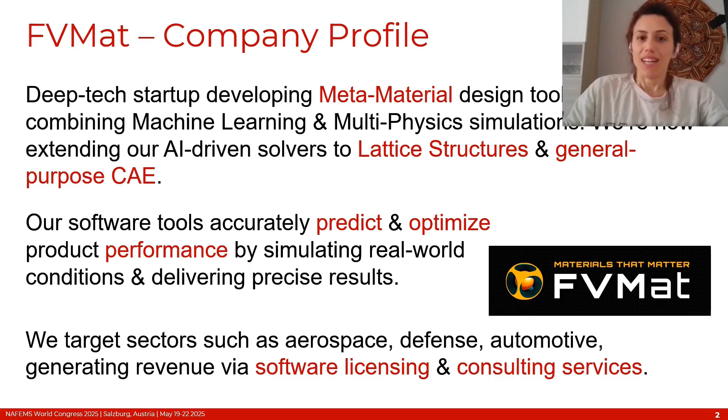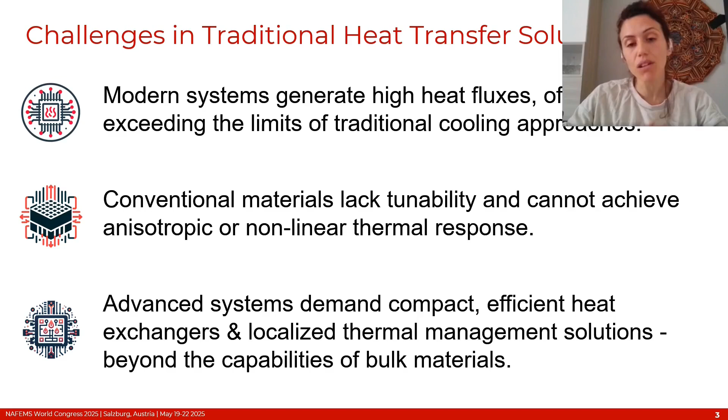Let's start with the challenges in traditional heat transfer solutions. Modern systems face increasing thermal loads that exceed the limits of traditional cooling solutions. Conventional materials cannot provide tunable or anisotropic thermal responses. And what we need are compact and efficient thermal management solutions that can go beyond bulk material capabilities.

Metamaterials can offer a solution to this problem in the sense that they offer unique properties which come from engineered microstructures and not necessarily composition. But our company developed a novel concept of metamaterials based on a structure which is a repetition of unit cells made of a solid matrix and a void inside of it, which can be filled with a substance, can be fluid, solid, particles, or a gas.

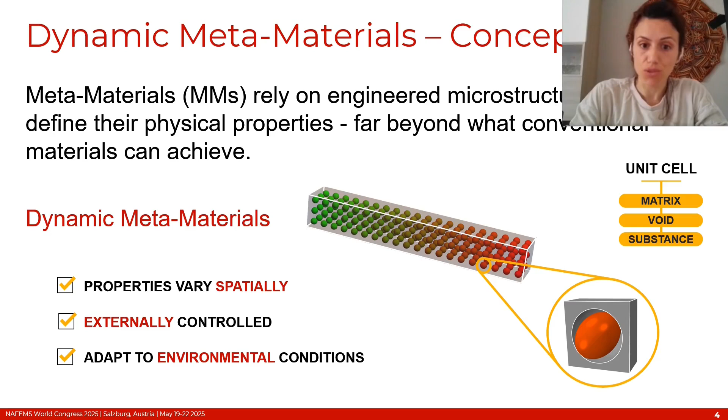And this kind of metamaterials have properties that vary spatially. They can be externally controlled, and they can adapt to environmental conditions. Let's start with an example of this kind of metamaterials. We design dynamic metamaterials by combining different phases, like solids and fluids, to achieve directional heat conduction, for instance.

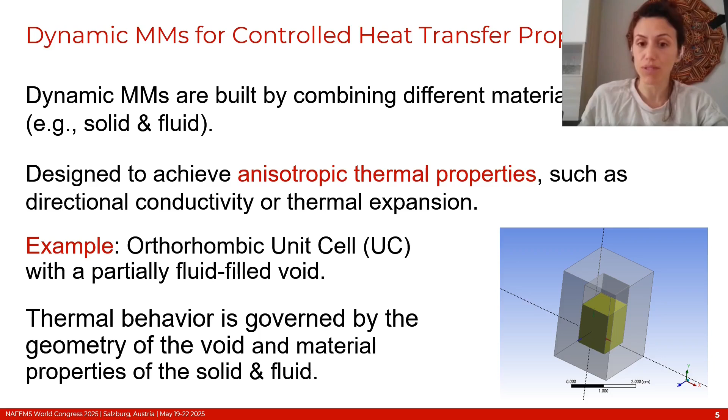And an example is an orthorhombic unit cell, like in this figure, with a similarly shaped void inside, partially filled with a fluid. The thermal behavior of this unit cell is governed by void geometry and the interaction of the solid and fluid phases. The physical properties in terms of heat conduction can be summarized in the thermal resistance of such a unit cell, and this property can be calculated semi-analytically based on a series and parallel of composite materials.

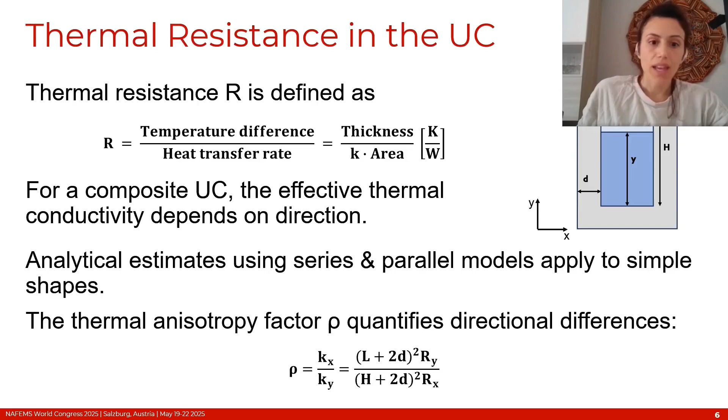And one can define a thermal anisotropy factor that quantifies the directional differences, defined basically as the ratio between the conductivity along two different axes. Now, simulating heat flow through such complex microstructure is critical to achieve controlled directional thermal properties.

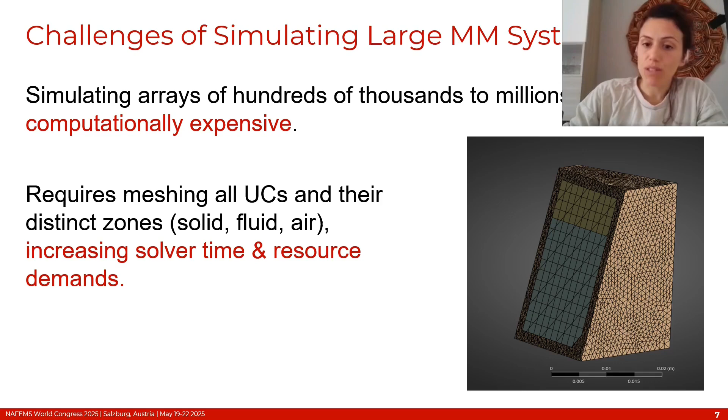But simulating arrays of hundreds of thousands to millions of these unit cells is computationally expensive. We need to mesh and simulate every distinct zone, the solid, the fluid, the air, which becomes resource intensive and time consuming. To tackle this, we generate a large data set using high-fidelity simulations by varying the geometry, the material, the temperature, and then we train machine learning models to predict thermal conductivities along the three axes.

This machine learning model, which predicts the thermal behavior of a unit cell given their properties, can be embedded in finite element software for fast real-time predictions, enabling efficient simulation of large-scale, spatially varying metamaterials.

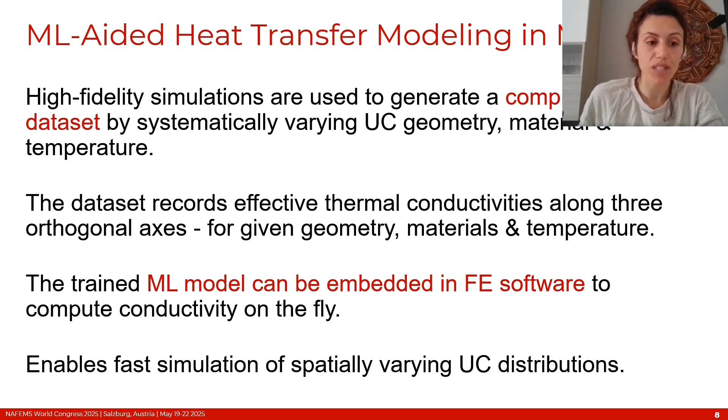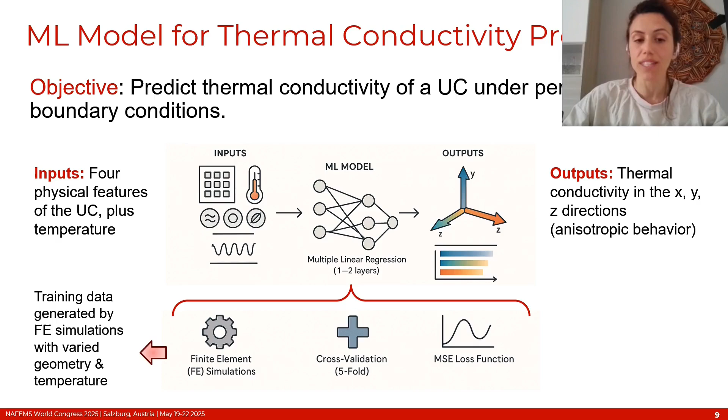Our machine learning model uses 4 physical unit cell features and temperature as inputs to predict as an output the anisotropic thermal conductivity in X, Y, and Z direction. All the training data are generated by finite element simulation, varying the geometry and the temperature. We validated this model on a 10 by 10 by 10 array of unit cells.

And the full finite element simulation for this structure took around 21 minutes to run, while using our machine learning-based tool, it just took 23 seconds, showing comparable accuracy. This shows the power of combining the machine learning tools with traditional finite element simulations, which is a huge gain in computational times.

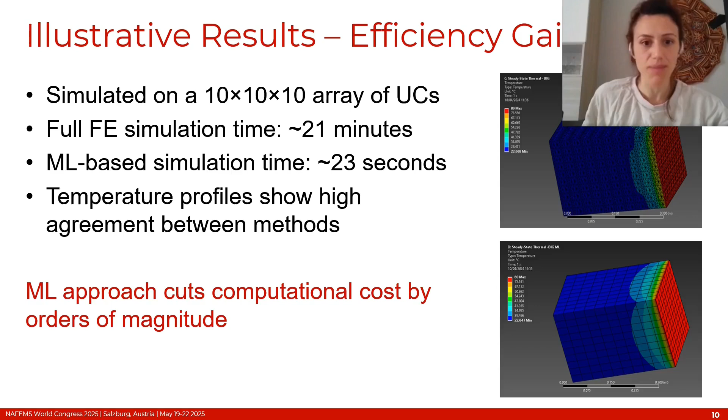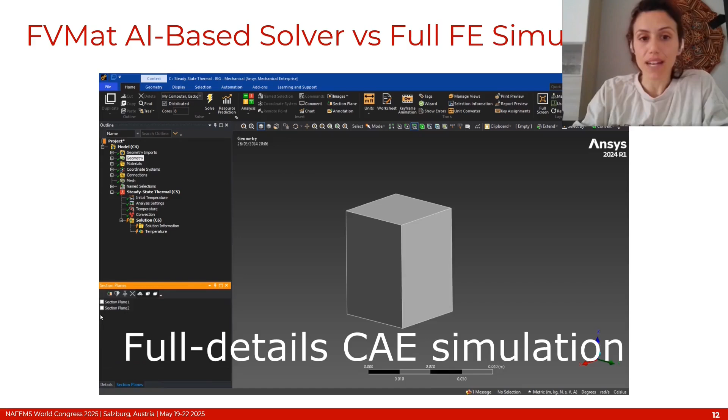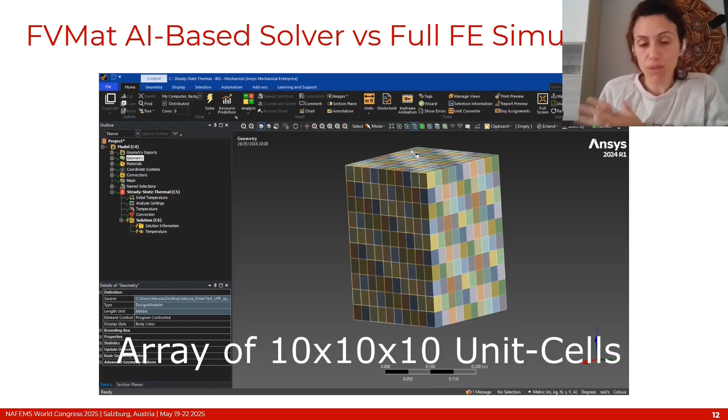Here is a movie that shows the comparison between the full finite element simulation and the AI-based software that we developed. Here, I show how to construct the 10 by 10 by 10 array of unit cells with a full mesh of the solid part, the fluid, and the air. I show a section just to make sure that the meshing was fine enough.

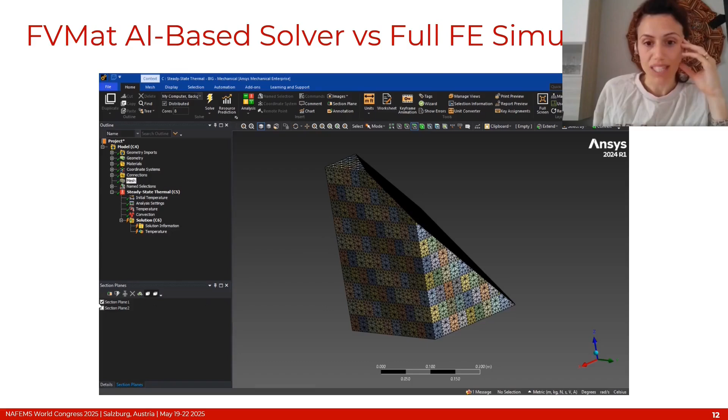And also here another section of this composite body. The boundary condition is the imposed temperature boundary condition at the bottom and convection on all the other faces. And now the simulation will start, and we skip 20 minutes of the solution being computed.

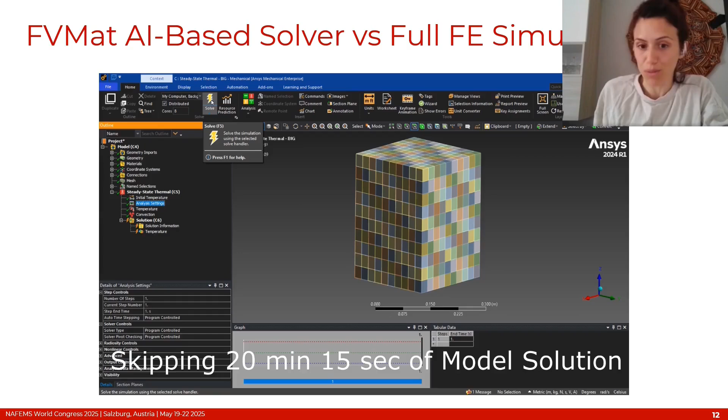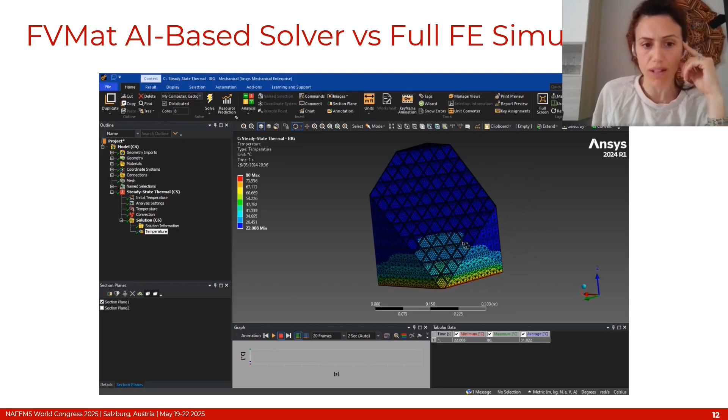There's also a warning that the time was too long. And in the end, we get a temperature profile in this body with a high temperature on the bottom, where the high temperature was imposed as a boundary condition, and a temperature profile going from hotter to colder until the top, with a very specific profile. The total elapsed time was 20 minutes, 15 seconds.

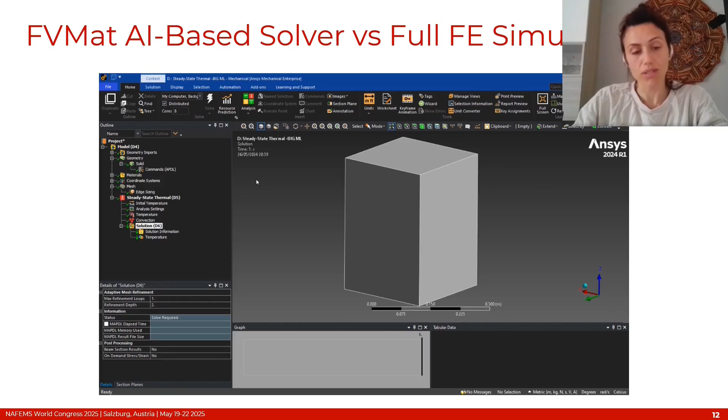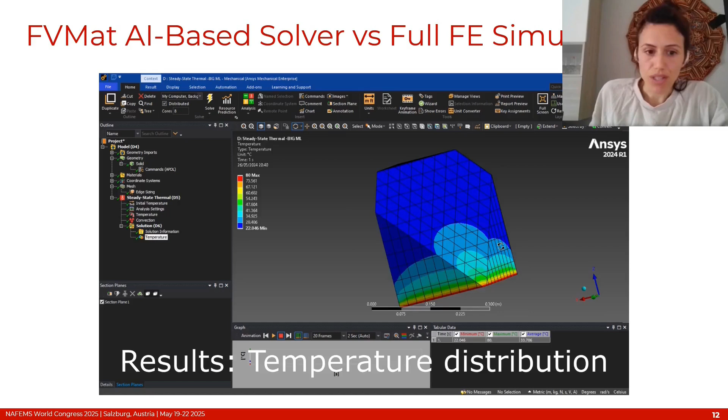Here I show the same simulation with our AI-based tool, with the same geometry. So I have 10 by 10 by 10 unit cells. The simulation starts with the same boundary conditions, and it just takes 23 seconds to get the solution. We get the results, and the temperature profile after 23 seconds is very similar to what we've seen in the full detailed finite element simulation, with a much reduced computational time, by orders of magnitude.

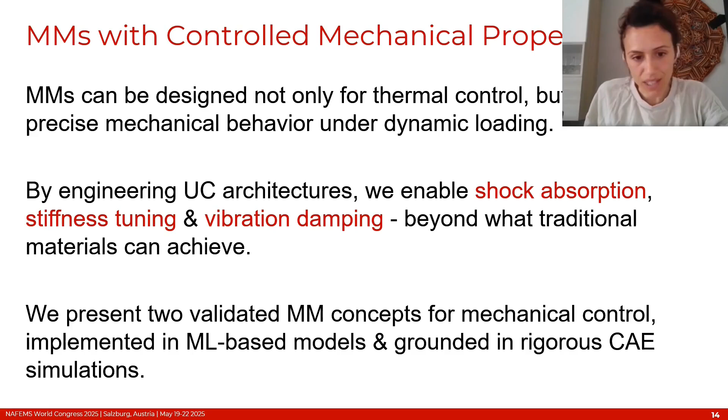Let's move on. Beyond thermal applications, we've also developed metamaterials for mechanical performance, enabling shock absorption, stiffness tuning, and vibration damping. Let's look now at two validated concepts that demonstrate our capabilities. The first concept is a unit cell that features a void with a lumped mass connected by springs.

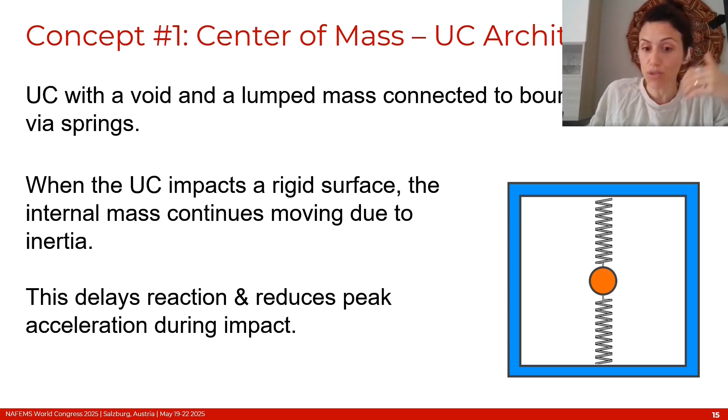And under impact, the internal mass moves due to inertia, delaying force transfer and reducing peak acceleration. We can tune the mechanical response by adjusting the internal mass, the spring stiffness, and the structural compliance. Simulation results show up to 30% reduction in peak acceleration and 70% impact energy absorption.

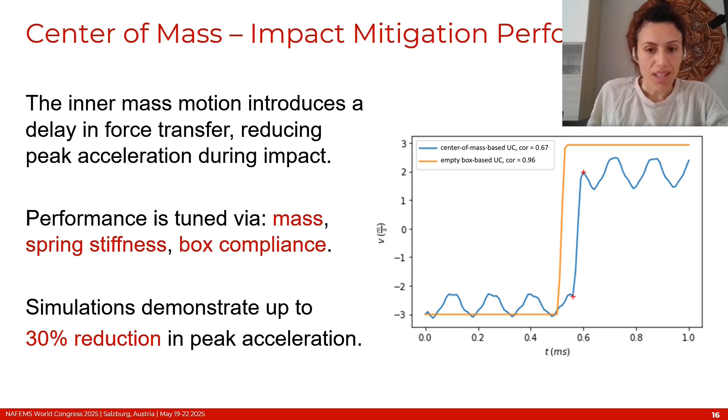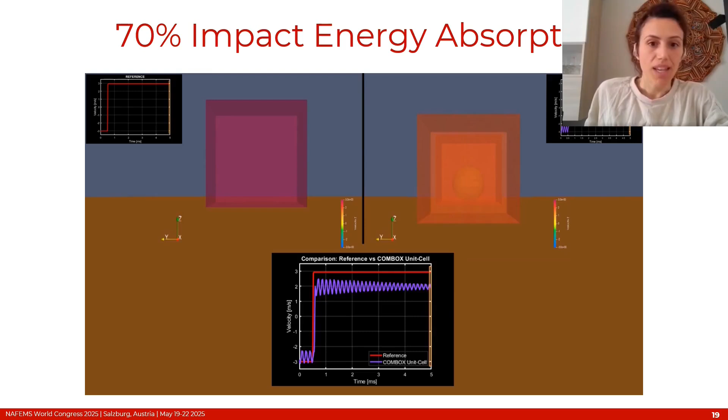The second concept is a unit cell with a void filled by viscous fluid, which enables energy dissipation through fluid motion under impact. Indeed, the internal fluid flow absorbs most of the kinetic energy, and if you look at the velocity as a function of time on this graph, again, the red would be an empty unit cell, and the purple is our unit cell filled with fluid.

The acceleration, which is the slope of the curve, is incomparably less abrupt. And tuning the matrix stiffness, the void shape, and the fluid properties, again, we can optimize the impact performance.

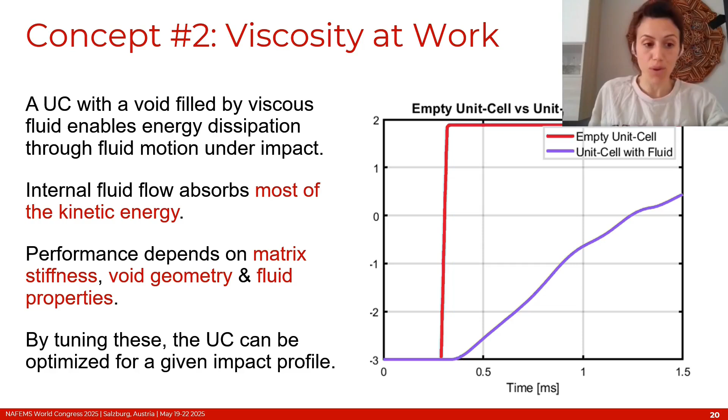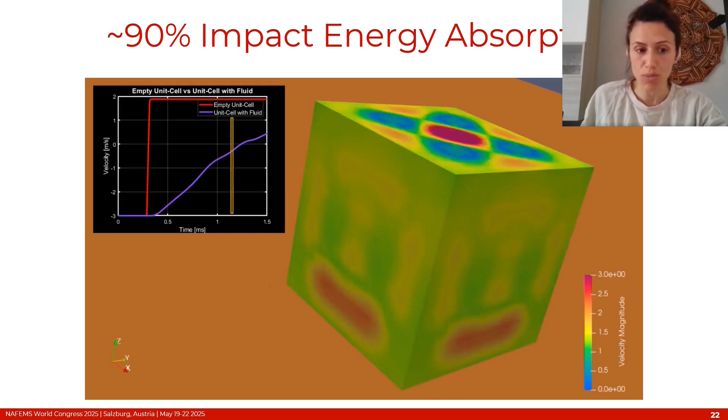In this movie, we see a simulation of this unit cell under impact. On the top left, we see the graph of the velocities, remembering that the slope of this curve, which is velocity versus time, is the acceleration. So the acceleration and then the force of the unit cell is much reduced, and a rough estimate would give at least 90% impact energy absorption. And this is a promising direction for designing protective materials with embedded damping properties.

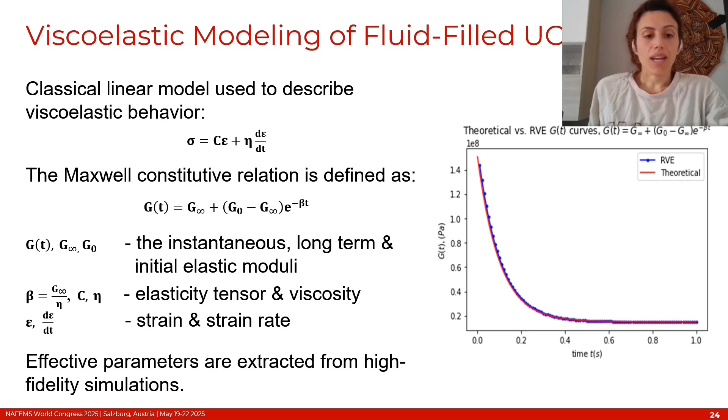Here we see a typical viscoelastic modeling of fluid-filled unit cells using a classical linear model to describe viscoelastic behavior. We can write the Maxwell constitutive relation defining the instantaneous elastic moduli related to the long-term and the initial elastic moduli, and linking also the elasticity tensor, the viscosity, and the strain rates. And all these parameters can be effectively derived from high-fidelity simulations to be used then in our machine learning models.

And we used machine learning models which are trained on high-fidelity simulation data to predict such effective properties of fluid-filled unit cells. The model delivers near-instant results, making it ideal for rapid optimization and design exploration.

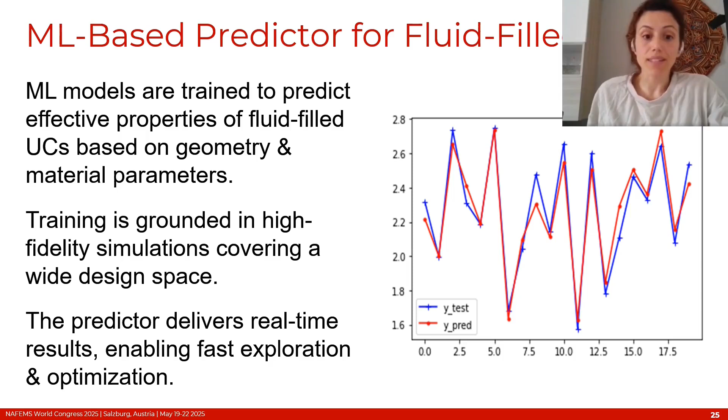In summary, we have demonstrated that machine learning-enabled metamaterial models significantly accelerate simulation and optimization. Our next steps include exploring more real-world applications, combining unit cell types for multifunctional materials, and expanding AI solvers to lattice structures and general-purpose computer-aided engineering.